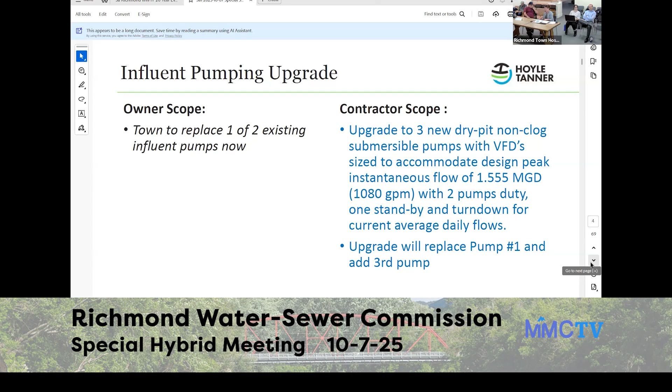The cost for that has been pared back to just show the two additional pumps, the VFDs that will go with that, and the level control system. We do need to upsize the force main from the pump over to the headworks. That force main is not hydraulically... in final design, I can reevaluate that with the pump manufacturers to see if the heads are excessive. In preliminary engineering, it was too excessive at that peak instantaneous flow, but we'll definitely reevaluate as we design it going forward.

That is the price tag, about $500,000 for this, and I want to back up - a couple of caveats. This is tied to the April 2025 ENR index, which becomes important later when I show you the costs at construction time, because I'll escalate them to when you're going into construction. The numbers in these individual cost estimates are tied to April 2025, and include the contractor markup, which is their overhead and profit, their mobilization and demobilization, their bonds, their insurance. It includes all of that, and also includes a contingency for tariffs, because we just don't know what's going to happen.

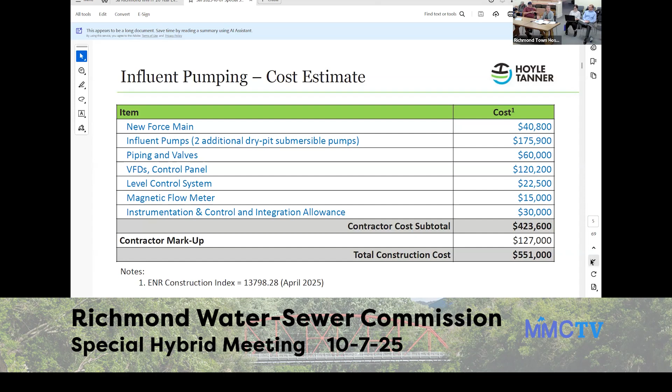You can go ahead to the next slide. Okay, headworks - let's move into this slide.

We went back to the two alternatives we had in the PER. In the original PER, the recommendation was to build a brand new headworks - well, not brand new, but reuse the wet well and put in a piece of screening equipment that could take out rags and all the gross stuff from the channel before the pumps. They took a tour - headworks is the building you walk up to next to the wet well. Right, so we were originally envisioning retrofitting that deep wet well, putting in an intermediate floor and a building above it to get headworks and screening before pumping. The reason is, ideally you'd like to protect those pumps.

We saved a lot of money by going back to alternative 1, which is just to replace the equipment in kind in the building that you toured. So this alternative, the recommendation is to replace in kind - it's all contractor scope, not something Steve would do. This is basically replacing that unit with a Headworks Acceptance Plant, a package micro-strainer and grit removal, all pretty custom, and it has to go into that space that's there right now. I found another manufacturer who could do it, so we could have competition - we can talk about that. But this is alternative 1, whereas before we were looking at a new headworks building, which was alternative 2. We can go to the next slide.

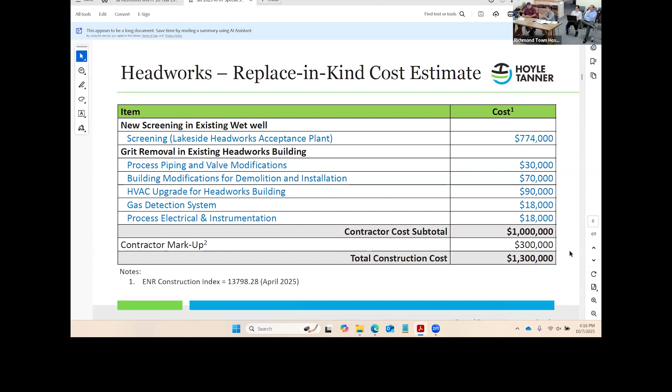In big wet weather events, what would happen if all the flow is just coming in there and it's not getting screened? There is a bar rack, so you could get rags and sticks. Well, there wasn't even a bar rack at that time, it was taken out. We put the bar rack back in.

Yes, the plant operates much better this way. He has protection in front of the pumps in that manual bar rack. He does need to go down and clear it every day, but if we keep the operation of the wet well for the pumps at a draw fill and constant level, he shouldn't have the issues he had before. Historically, we haven't. The bar rack is eliminating a big chunk of change, but we still need to get the grit and rags out of the system, so ideally it would be great if it happened before.

Steve has made operational changes that are working for him. But the headworks would have done that.

This is another tangent question, but I assume we will have to keep running while we're under construction. Absolutely. Do we loop back to that later? Yes, we can, it's all doable.

No, that's a very good observation, a very good question. It's like one of our biggest challenges - we're gonna stop the flow from town for a week. They couldn't stop washing their cars when there was a water ban, so it's one of the toughest things for us to figure out. It is doable, though. You can do anything, Steve. I have confidence in you.

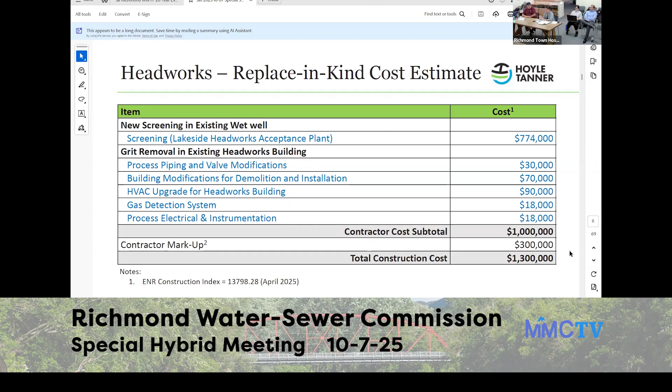We can go ahead and move on.

Biological treatment - these will go pretty quick. We're not gonna do much here. Those tanks are just flowing through. The only thing to happen here is, okay, maybe I should just back up.

The original plan was to switch to a compressed gas mixing system, which is fairly new technology. It's really energy efficient. We were gonna switch to that because we were gonna utilize that same type of mixing over in sludge holding. In sharpening our pencils, we decided that it's expensive, and what's working now, what he has now, works. So let's just stay with alternative one, which is submersible mixers. They're very low horsepower, so it's not like it's gonna be a lot more energy cost or anything like that.

There's 3. Steve is gonna purchase them on his own directly, and the contractor will be in charge of doing any electrical and instrumentation associated with them.

Those are in the headworks building, in the headworks tank that was below the slab, where you lift the trap door up. You can't see them - even if you look down, you wouldn't see them. All they are is a motor with an outboard prop on them.

It keeps everything spinning. They're about 16 grand a piece, the last one we purchased. I think we should replace the other 2 because we've replaced the prop on one of them - it literally was worn to nothing. But we did that with a spare prop that we had. So the other two, one has been replaced, the other two we should replace. And that's not a problem.

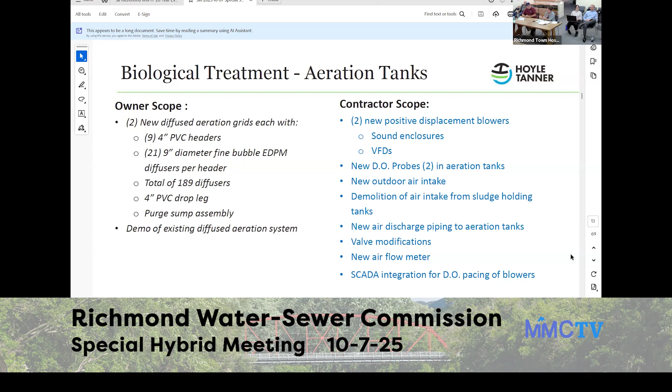I just want to go back to the blowers. We left them in the cost estimate, but we are going to bring in the manufacturer's service technician to take a look at them. Typically you size a blower for your full flows - the aeration requirements at full flow - and you're nowhere near that right now. So it's possible, but these blowers, the condition of them isn't bad, and they'll be okay for a while longer.

I'd like to bring in a technician to look inside them and see if there's any corrosion, because we had the idea 20 years ago to bring air from the sludge holding tanks over, which wasn't such a good idea in hindsight - there could be some hydrogen sulfide corrosion in there. They would take a look and we'd run some blower tests to really see what they put out, and if they're suitable for the design points we need right now. If they're not, we'll replace them. If they're okay for now, this could be something you put off for maybe 5 years, maybe 10 years.

This could be an item that could be put off. New blowers have a pretty big price tag, about $250,000. The intake is what makes the noise, not the blower. This summer, when it was so hot, I switched to pulling in fresh outside air. And truthfully, you guys were there while the blowers were running.

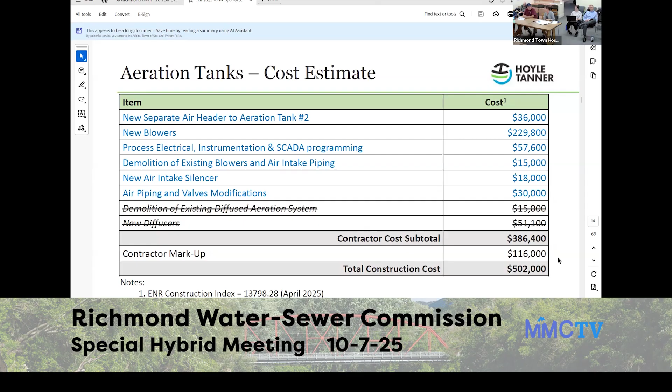So this price went down, if you can see, by about $65,000, but that's before all the multipliers, so actually the savings were better than that. Just to point out where we had some savings, I struck them out in the cost estimate. Like that. We can go ahead to the next slide.

So, chemical feed. Basically what we need to do here, the recommendation was that the containment doesn't meet standards right now, so we need to add a little bit of height to that concrete. That can happen a couple of ways.

We can drill in and put concrete, or Steve could come in with some cinder blocks and make it higher. We've already anticipated doing something with that, so increasing the height, and then new chemical feed pumps and valves, and this is all scope that Steve feels comfortable doing.

We really want to, and I've talked to you guys before, but the workhorse LMI chemical feed pump that we have throughout our plant, and a lot of plants out there, there are better options nowadays. Way better. I really think we should look at switching our chemical feed pumps to a new style.

With these more sophisticated feed pumps, they have controls. We can do a lot of automation that will cut chemical consumption down, which is savings for the town, because this coagulant is what we use to get phosphorus out of the wastewater. It's expensive, and the prices just go up and up every year.

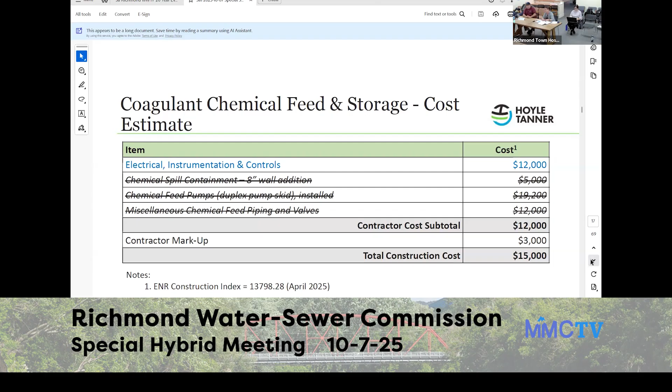Ideally, we have the ability to see what's happening with their sodium aluminate now, but we don't have any control of it. This would give us a little bit of control. I think it'll pay for itself in chemical savings. It definitely will.

Return activated sludge and waste activated sludge pump systems. I call these RAS and WAS.

Steve is going to do any kind of valve replacements. I think you've done most of them already on the WAS side of things, suction and discharge off of that Penn Valley pump. Not on the RAS, but it's not a problem. Anything we need to do with the plug valves, we can take them apart, rebuild them. That's doable for us. The only thing we took out is that, because Steve feels like him and the team have done a lot of them.

So the RAS is controlled by a pinch valve because it all flows by gravity. It's this big valve that's got a bladder, it looks like a water bottle or a water bladder. The valve just pinches it from either end and it controls the flow. It's over 20 years old. Right now it's set for 70 gallons a minute flow through it, or we can throttle that down and it adjusts itself. When we're wasting, we shut it off totally and it closes. It stops the buildup in the clarifiers, the sludge that builds up from going back to the wet well. You're constantly trying to manage that solids level in the clarifiers because it's all part of the biological process. You need to remove a certain amount of solids, you need to recycle a certain amount of solids. Think of it as the food for the microorganisms in the biological process. There's a certain percentage you recycle, RAS, return activated sludge, and a certain amount you waste, WAS, waste activated sludge. It's about balancing those kinetic kind of reactions happening in the treatment process.

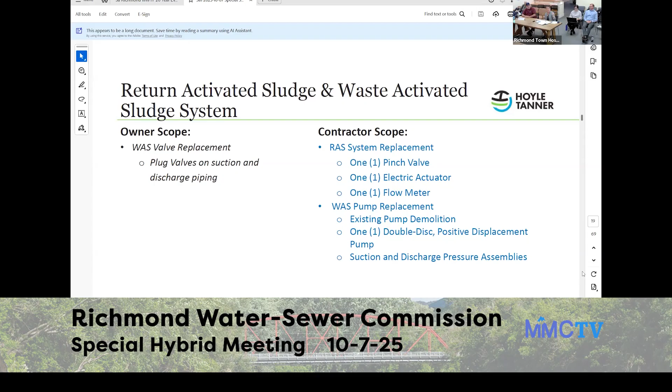So the contractor scope would be the RAS valve replacement, the electric actuator and the flow meter, and the WAS pump replacement would be a new Penn Valley pump. The cost for this is about $150,000.

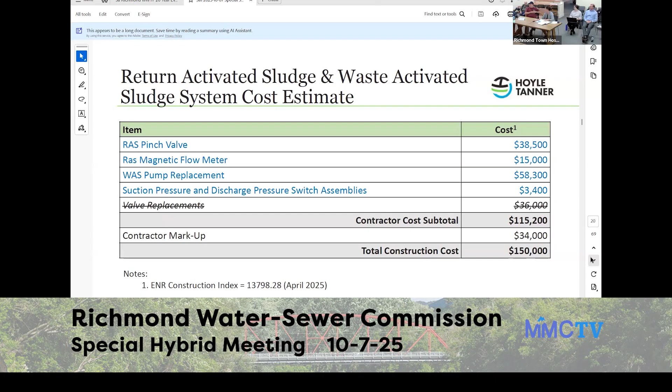So these, are they Quakers? They're made in Pennsylvania, I don't know. I'll tell you later, I saw them at WEF and I told them I'd be calling soon. I told you guys when we toured there, we've got 4 of them, they're workhorse pumps, they'll pump broken stuff, and they're easy to fix. They've made improvements that make it even easier. I've talked with people who hate them, but for us, they really work. That's all that matters.

So filtration, those are those big blue tanks after the clarifiers it comes in. That's where we're separating solids out, and that's where all the phosphorus removal is really happening. We're coagulating, we put in the chemical, it binds the phosphorus out of the liquid stream, and you create a floc, and you're then physically separating it. Think of it like a coffee filter. We're physically separating it, and the phosphorus is bound up in those solids. So that's where the phosphorus removal is happening.

Owner scope, and I may or may not have gotten this quite right, because you keep doing things and I'm not sure.

I know Steve's already changed all the cloth on them, and you've been changing valves and actuators. The contractor's scope would be, we still need to come in and do an assessment of the steel on those tanks.

I suspect there are only superficial things that need to be fixed. I don't believe the whole tank needs to be replaced. We need to have somebody look at them, because there's one that has a considerable amount of rust on that tank itself.

I have one that I'm more concerned about. I don't know why, but this is a risk.

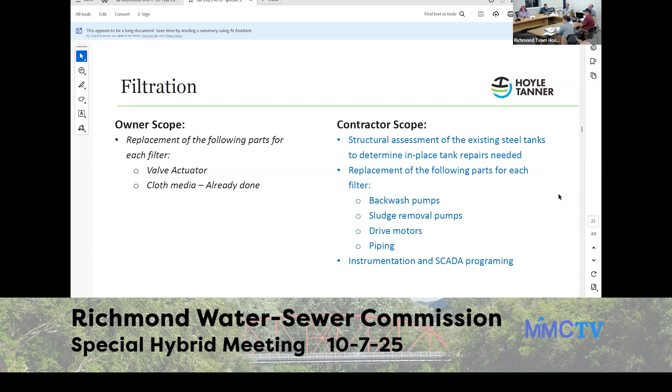So, a little bit of savings by doing the cloth themselves. There's still a significant cost for new panels, PLCs for these, and I did include that in here. Yeah, because their panels are getting old.

They're 20 years old, and the upgrades that have been made in the electrical are much better now. The ones that we have were like first generation, the guy told me. They're obsolete, parts and pieces aren't available for them. His thought was, it's not your valves that are failing, it's your panel, it's the parts and pieces in there. And Allen Bradley doesn't make those parts and pieces anymore, so you're stuck with upgrading.

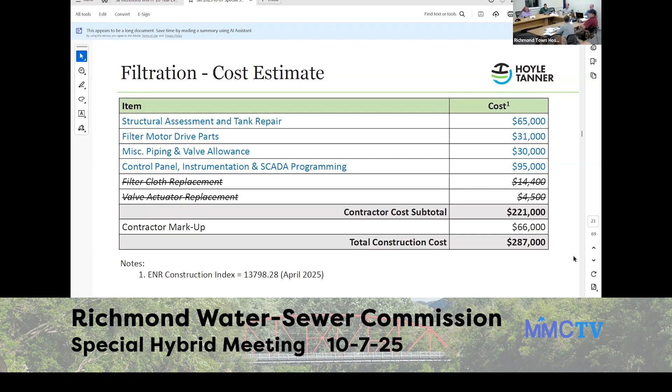So that's where I think we do need to do it. The filters work really well. We don't have much problem with them, other than the control panels and some of the monitoring that goes to SCADA. You can go ahead to the next slide.

UV disinfection, so basically we're talking about just replacing lamps and, where is it, it's the sensor. It's done, it's already done.

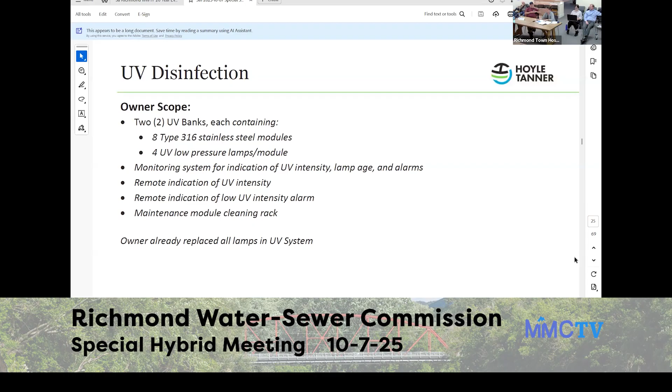We've replaced all of it, so the lamps are all brand new. And we have a brand new sensor. It is compatible to use in SCADA, it's not a Trojan, they're approved. It works, it gives us a number, the state has been happy with our number. So I feel content with it. It was considerably cheaper, so you can go to the next slide.

You can see I know you're a Trojan fan, but yes and no. So we're eliminating this from the project. We can go ahead to the next.

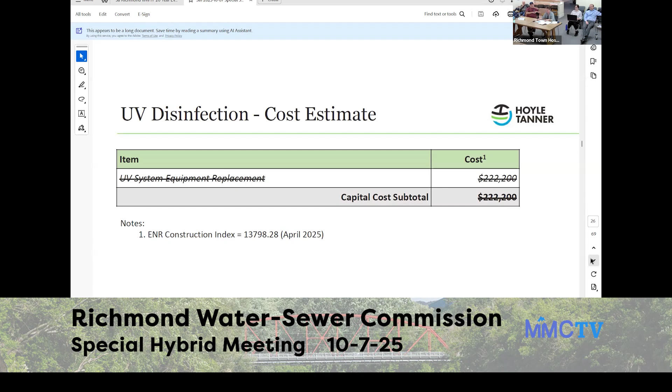So effluent flow measurement, next thing is, you can go ahead. This is all contractor scope. We need to replace that V-notch weir, new radar level sensor and flow meter, and SCADA programming. You can go ahead.

This is where it goes out to the river. There's an actual V-notch that it flows through. It doesn't measure high enough.

Whenever I have somebody come and they're like, why do you have this, that's the flow meter, Sigma, yeah. That particular flow meter was used. It's ultrasonic, and that was pretty good technology 20 years ago.

It's beside the disc, so there's a level sensor, and the sensor is ultrasonic. That technology was great 20 years ago, that's what everybody was doing, and now everyone's getting away from them because it's better. Everybody that comes and does anything there, they're like, you still have this? Why do you still have this?

So we're gonna go to a radar level sensor, which is way more precise. It's just a different sensing mechanism. The V-notch needs to be moved up and increased so that I can accurately measure higher flows.

Right now his flow meter pegs out at a certain MGD. When the river flows up, the V-notch is actually underwater, so it's submerged and we're not getting accurate measurements. You just can't get the flow.

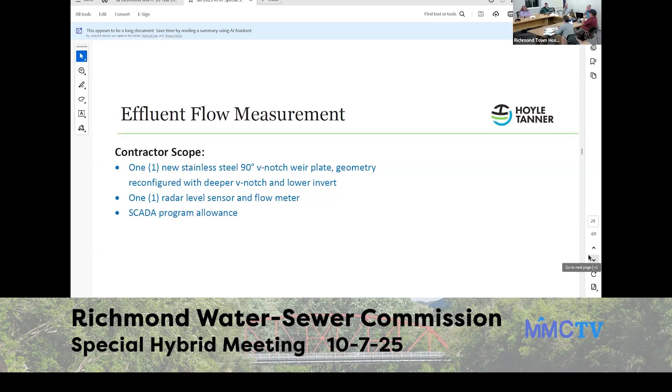Catch you with another dumb question - why do you need to know? Permit. It's not a dumb question at all. You have to measure what you're putting out to the river, and then report it, every day. You have to measure it usually at the last thing before you discharge. Typically the last thing.

So you can go ahead to the next slide. This is a small dollar amount. You can go ahead to the next slide.

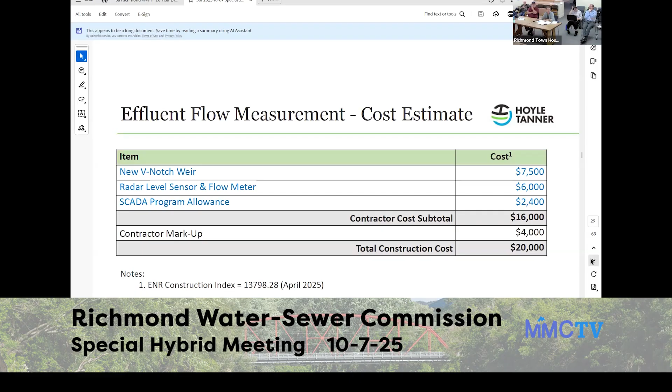Effluent pumping and outfall. So this is all contractor scope, and this is something that is critical. I think if you were on your plant tour, did they show you this? Yeah, I showed them everything. This is the discharge to the river, and the pump station that essentially would be built on the outside of the plant.

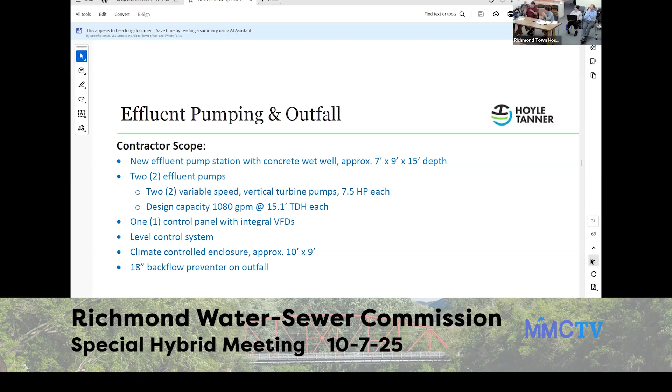Can we go to the next slide? This is the discharge, that's the discharge currently. This pump station would be located on the outside.

This is my conceptual idea. This is conceptual, it's not designed, but it's to put a little pump station out to the side. Normally, flow would just flow straight through it and out.

What would happen is if the river comes up, that backflow preventer would slam shut. And if you can imagine, I've still got flow coming through the plant, so I'm starting to fill up the wet well.

There'd be a level sensor that would kick on 2 vertical turbine pumps located in that square, kind of where Josh's cursor is right now. Those would discharge to, for all intents and purposes, a high water discharge, out the side of the building towards the river.

I have talked to permitting folks about whether or not that was considered a different outfall by the permit, and they agreed that it was not, because the river is right there. If we're in this situation, we're still discharging to the same stretch of river.

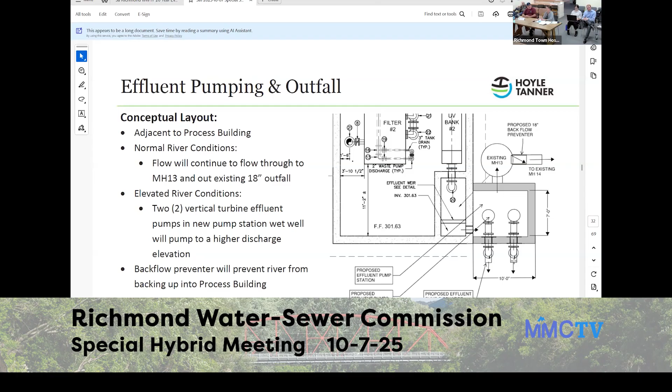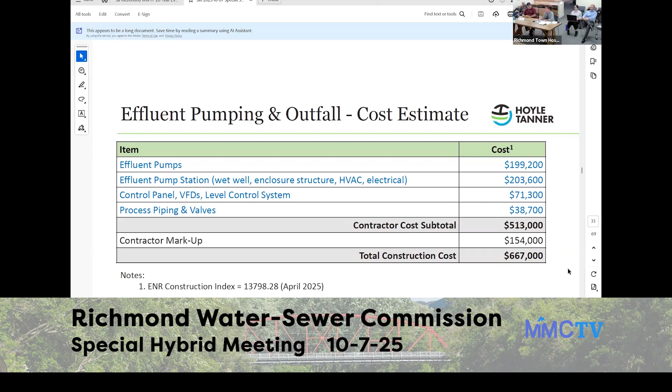So you can go to the next slide. This is the price for this, and again we didn't shave anything off of this, because this is something that needs to happen.

You can go to the next slide. I think you better talk faster, I think.

Septage receiving facilities—we made no changes to this. We understood from our last meeting that we were gonna proceed with septage receiving and dewatering, so the full scope that was in the preliminary engineering report is being presented here.

Because I'm running out of time, I'm gonna go real quick. So I think you guys have read the report, right? Or maybe, okay, it's the same, I mean we tried to—yeah, I know, but I understand. Great nighttime reading. But you're right, great nighttime reading.

Okay, we're just gonna—new septage receiving, let's go to the next slide. I think I have a visual.

We're looking at separating that room from the garage, and making it its own space. Again, this is conceptual—it could change a little bit from this, depending on the piece of equipment we put in. You can go to the next slide.

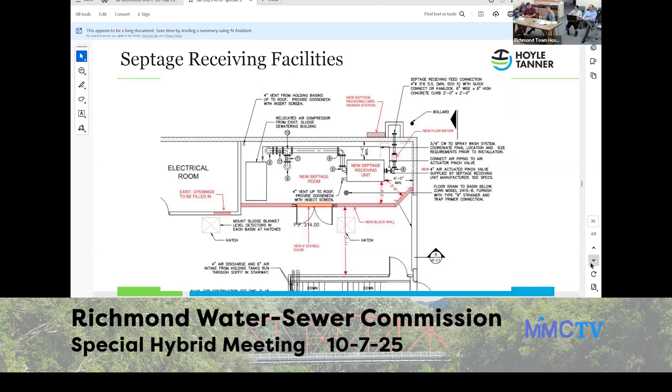This has a pretty big price tag, with the septage receiving unit and then modifications to make that space. Go ahead to the next slide.

Also under the whole septage receiving is anything that has to do with the holding tanks. So these are improvements to those tanks, but what differs from the original alternative that we recommended—as I mentioned before, we were originally looking at a compressed gas mixing system, which is highly efficient. It doesn't use blowers to put oxygen in, it just mixes them.

We reverted back to alternative one, which is to replace in kind what is there now. So that is going back to blowers that impart dissolved oxygen into the liquid. It's a lot less expensive.

Currently we have one blower that does both tanks. So you're replacing that one blower? Replacing one blower that does both tanks, and replacing the blower for the outdoor sludge digester tank. So two blowers total, considering the digester and all. Yep. Okay, so you can go to the next slide.

This is the cost for those upgrades, and again this was significantly less than the compressed gas mixing. Just to note that Steve has been replacing diffusers, so we took that out of the scope—we'll have that done. That's about $100,000 in savings that we're taking out of the scope.

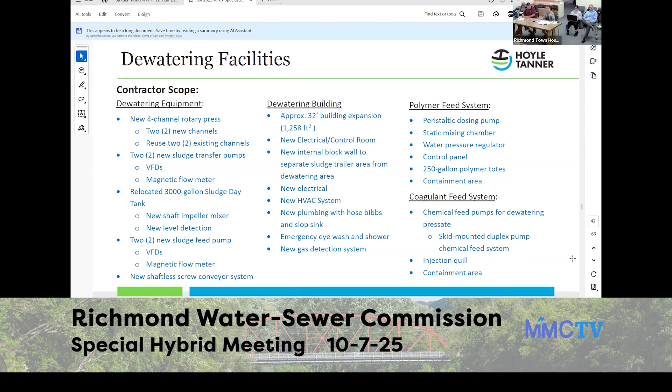Was he dewatering on the day you did the tour? No, I wasn't, it was empty today when I was there. We had an empty trailer and didn't have anything to dewater, but they were able to see it. Okay, so yeah, they got to go on a nice day. Okay.

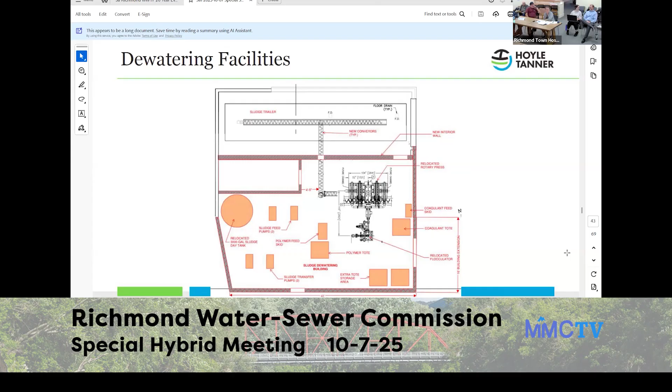You can go to the next slide. Again, these are all the things that I had in the report. This is a significant expense, but this is all part of that septic receiving upgrade. We can go ahead and go to the next slide.

Trying to hurry up. Operations building, there's just some minor things that need to happen. Can we go back to that other one? Just, I know you're. Yeah, okay.

The feed pumps, you want us to start adding sodium aluminate in the press aid? In the press, we'll dose it. So we'll put a chemical feed system there. So this basically is a full replace.

Well, we can reuse the channels that we've got. We're gonna use the new flocculator that we haven't installed yet, that we'll try to get installed this fall. We're gonna use the new control panel that we're gonna install this fall. We've already paid for them, we've had them for a year.

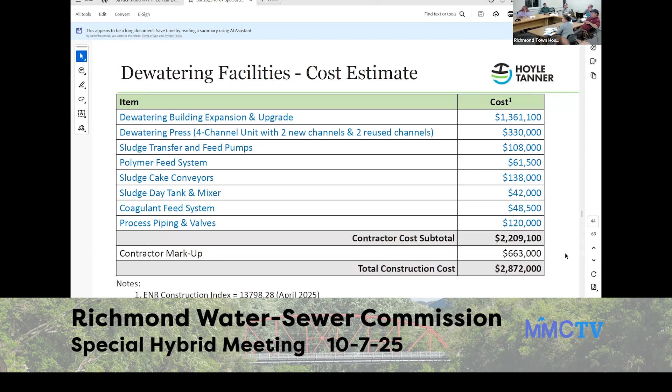All right, we can go ahead. The big thing is the conveyor. I got a new idea, but we'll talk later.

Operations building, there are some plumbing and HVAC upgrades that need to happen. And the top one is, I need to put an access door in that office so that Steve doesn't have to hand carry up a 500-pound pump out of the basement.

So, went soft on this, huh Steve? Huh? So, went soft on this. Yeah.

So the only thing we took out of the scope was any kind of laboratory equipment, the town will buy on their own. We've basically been keeping up on that. So we're not doing any architectural upgrades inside, we're not upgrading the lab. The operations building is pretty much staying the way it is, but we'll make some improvements to the HVAC system.

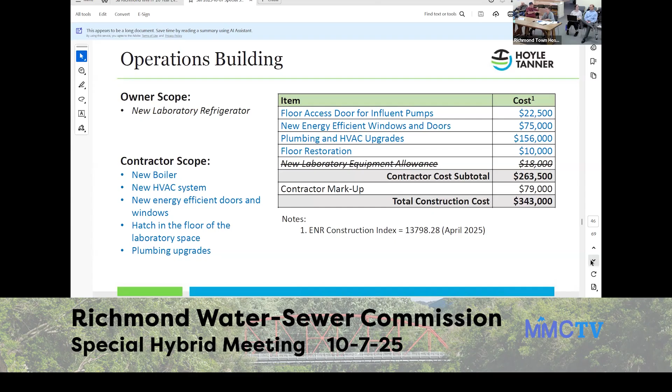Your doors too - so floodproofing doors, there are a few doors that are below the 500-year flood elevation, so we need to have contingency. All they are is like slides, you put the stop logs in if we have an Irene coming. It's not something that would stay up all the time. A lot of other facilities have these, like Johnson, Woodstock - they all have them.

We need to do an electrical assessment of the generator and the whole electrical system. I've kept in the cost estimate a new generator - I don't know, I'm not an electrical engineer. I need to bring in an electrical engineer to do those assessments. So there's a little bit of unknown electrically, what needs to happen at the plant. This could be something that grows, like the cost may go up, because I am not sure.

We're including new SCADA programming to incorporate new equipment, a new plant water system, so you cannot use town water for certain wash up and certain functions over at the dewatering.

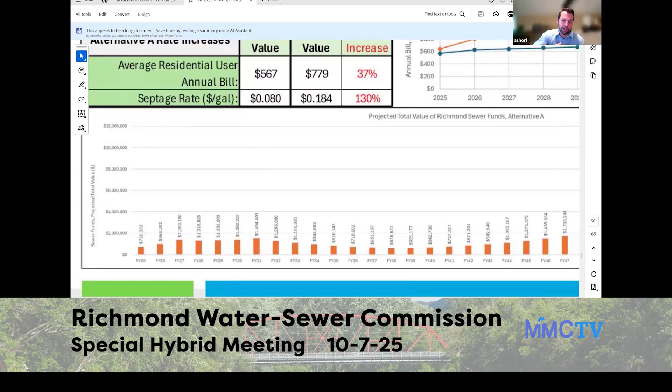That's a very long-term projection, but really what we're trying to look at is we want to keep that number above zero for the entire duration. The intent of that is it's going to simplify everything financially on your end. We want to make sure that you can generate enough revenue, in addition to the sewer reserves that you have available, to stay in the black.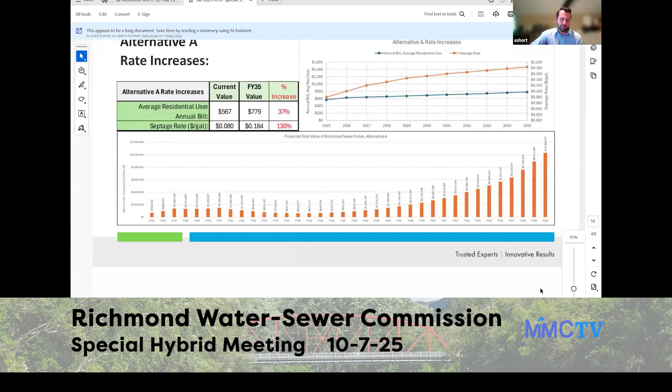So that's really the big thing we're looking for when we're varying all of these input parameters - we want to say, okay, we can keep that number above zero. This will be beneficial for the town. This would be a viable payback structure for you to be able to pay off the loan.

So we are looking at, you can see a couple little bumps in the initial period. FY 28 is when we had contract 1 starting, and then I believe it was FY 32 for contract 2. So you can see that there's an initial little drop, and then after FY 28, FY 29 is not increasing the same way, same with FY 30. You're starting to gain revenue again, and then FY 32, that second contract hits.

So then you start to see the dip again. Throughout all of this, you're continuing to increase your sewer rates and your septage rates by the same as the inflation, so that's not a significant number - that's only 3.5%. However, your principal payment on the loan is not going to change.

So what you're really doing is weathering the storm in the initial years where you're not necessarily starting with enough annual revenue to make the annual payments. But as you increase gradually, eventually you'll outpace inflation, where that loan repayment becomes significantly easier for you to make. So for all of these, we're going to see that little dip in the middle - I call them the lean years, sort of in the FY 30s.

Okay, so that was a lot of overview. That's alternative A. You can click to the next slide. A lot of that's going to inform all 5 of these alternatives, just kind of generally what we're looking at here.

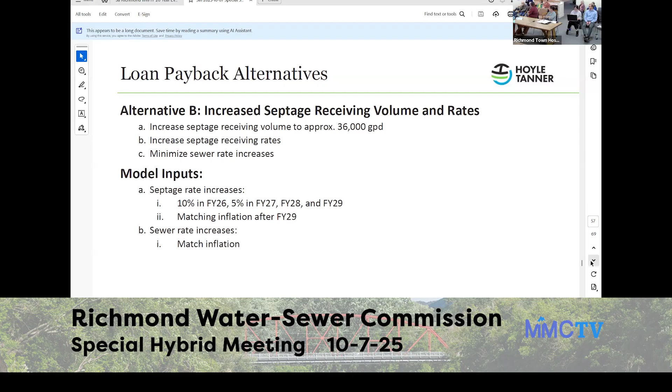As somebody who was water and sewer commissioner when I was on the select board 25 years ago, one of the concerns was when we started really increasing using septic as a moneymaker, was the neighborhood. I think you have to really think twice about sending trucks down there at night. Maybe there's an alternate way to get it there, but that was a concern 25 years ago - the neighborhood with the big trucks going down and the noise that they created.

It's a very good point. All right, so are you ready for the next slide, Aiden? Sure, you were ready a while ago.

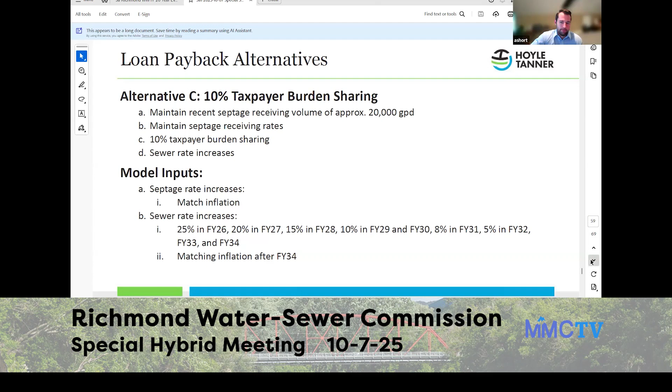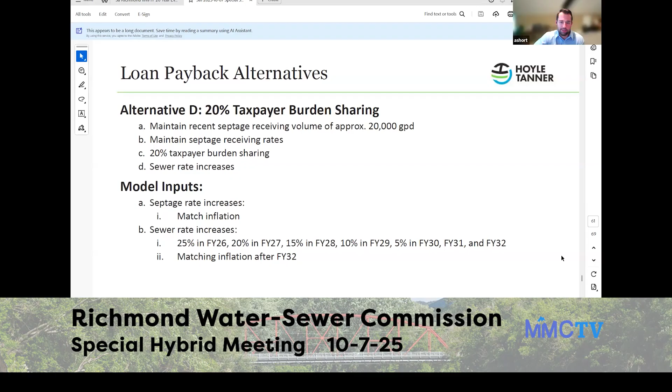Similar to the last one, matching inflation for the septage rate. The sewer rate increases are more significant than alternatives A and B, significantly more so, where we were not really increasing those, but this is reduced relative to alternative C, where we were looking at 10% taxpayer burden sharing. That makes sense—we're basically taking an additional 10% out of the revenue that needs to be generated by ratepayers for this alternative specifically. So we're looking at 25%, then 20%, 15, 10, and then a few years of 5% in the FY30 to FY32 period. You can go to the next slide.

You can go to the next slide.

Alternative E is actually the one that we were most excited about. This is something we've only learned about relatively recently, but basically the Vermont Bond Bank will allow CWSRF loans to be suppressed for up to 100% for the first 5 years. The way this works is you still need to pay the administration fee annually, but you can suppress by anywhere from 10 to 100% how much you are paying from the principal in those up to 5 years. So when you're suppressing that principal, you still owe the full amount, and that amount is slightly increased because you're paying it over a shorter time frame.

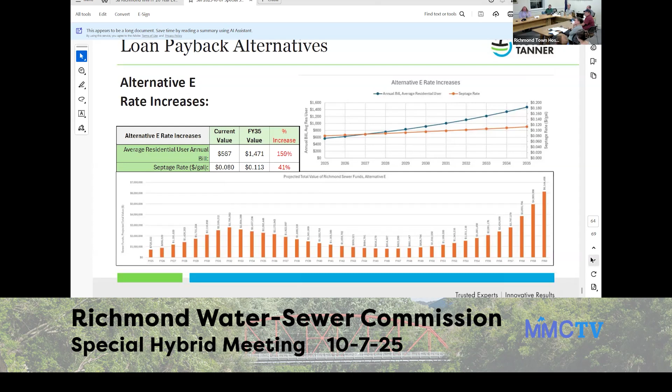So that's the intent of providing the tool as well. We have the base spreadsheet that doesn't really have any specific inputs - we might have played around with stuff, but the other 5 alternatives, we provided the actual tool that has those inputs in it, so you can play around with it as much as you want.

We wanted this to be something that - ultimately we don't want to be bringing this to the meeting and saying these are your only options. We want you to be able to mix and match from different alternatives and say, hey, this works really well for suppressing those first couple years, so we can be a little bit more conservative on bumping up sewer rates, or maybe this allows us to respond to changes in the septic market and we can bump that a little bit more conservatively. So yeah, that's the entire intent of the tool.

I believe we already delivered that as well, but I'm very happy to look at that with you, whatever's necessary to help out. I'm going to quickly do these conclusions and findings. I think I'm also now pushing on my time - I have a couple more slides after this as well that I'm hoping I can cover quickly. But I'll start with this, and feel free to jump in if you have any questions as I go.

So the conclusions - we've kind of discussed this in the overarching discussion, but the ideal scenario is alternative B. Basically, this would require minimal rate increases. There is more risk around this alternative though, just because of the volatility and uncertainty with the septic receiving market. Basically, there are factors that you can't control, that we can't control, so there is some risk in assuming that will be a viable approach.

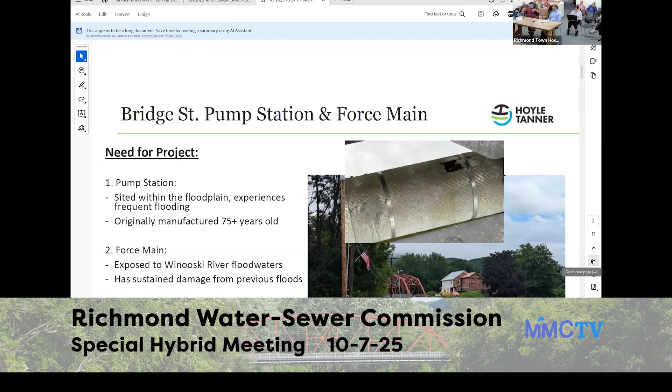But yes, for the most part, the rest of them become inundated with floodwaters going in. Yeah, sometimes they seal up nicely if there's a lot of silt and sand and it gets rusted, and it's not terrible. It's not like it's just an open drain hole, but it's something that floodwaters can get into.

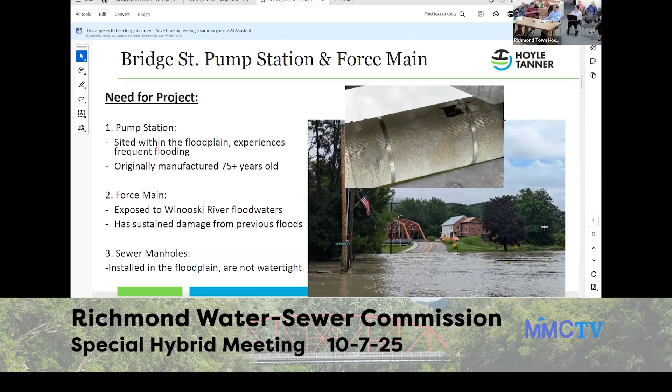Could you go to the next slide for me? So the map here in blue is the 100-year floodplain, a little tough to tell with the screen, but we're looking at the hatched area in red as the Winooski River, the road that comes down on a diagonal is Bridge Street. So the wastewater plant is that little bubble that's not in the blue.

So these are all the manholes that are basically right before the plant, or on the low end of town here. That's Church Street a little bit, Esplanade, Volunteers Green, and on the other side of the river there's a couple down that way too.

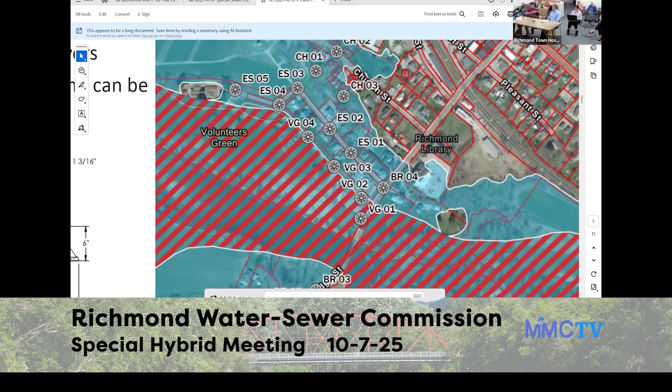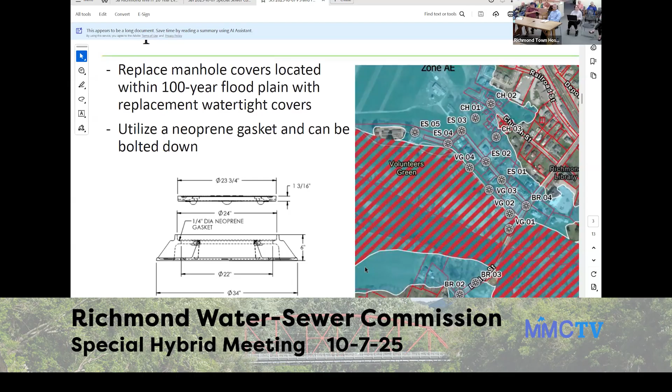Pan back over. This manufactured solution for that is a cast sewer manhole cover and frame. There's a neoprene gasket that lays in there and you can bolt it down, and so it becomes watertight.

So what contractor would do when this goes out, they would just cut the asphalt, peel that back, take the existing one off the top, go down to the block or the brick, put the new one on, repoint the mortar while they're in there, and repave around it.

No sealing with there... you think the whole inside ought to be? No, they have a product now, I've seen it, that they seal around the outsides.

Is that the shrink wrap type thing that they use? That would probably work, we could look into that. I mean it didn't seem that expensive when I was looking into some of the options out there, but it doesn't rely on the mortar making that seal. It goes around that joint.

I don't know the life of that product. I think it's newer technology. It's basically, if you've seen shrink wrap for wiring, they slide a collar over the outside of the manhole, heat it up, and it gets a nice fit on the outside of the manhole versus the inside. So that where the frame of the metal and the brick or the precast comes together, there's not really an exposed joint there. It's just one extra step to stop stuff from getting in there. I would love to look into that, I haven't done that on a project before.

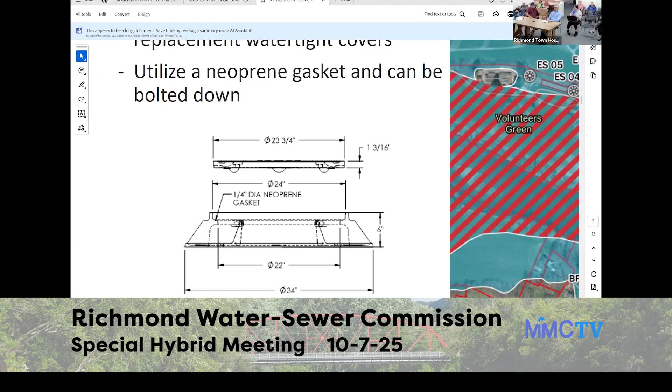Okay, so that's the first one, the collection system, the manholes. Could you go to the next one? So here's a better photo of the force main. You can see the bridge. That upper shiny pipe is the water.

On the top image, that upper pipe is the water, and below it is our existing sewer force main. That's the one with some staining, some water damage, it's discolored. It's supposed to be just as shiny as the top one. It's got an aluminum jacket on it, and it's just been roughed up.

The other photo on the bottom shows where a patch must have been done in the past, where a tree hit it.

In the first photo, you can tell towards the left side of the image, there's some parts of the jacket or insulation that are kind of hanging. Some of the carriers supporting the pipe have gotten thrown off with the velocity of the water, or the velocity of the tree hitting it.

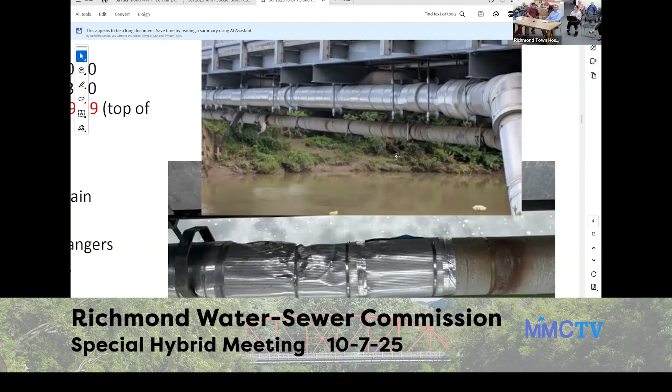It's the trees that come down. I think there was something hanging on it when we came last year. So we took a look, why is only the force main getting hit? Obviously it's lower, but we found out that it's below what the FEMA floodplain elevation is.

Now, when they build bridges, they build it to the 50-year and add a little bit of freeboard. In the wastewater world, we like to build at least to the 100-year. So we've got the elevations on screen: the 100-year is 310.3, the 500-year is 313. Sarah graciously crawled under the bridge and took some measurements for us. We think the top of pipe is around 309.

So that explains why it gets hit whenever it floods. We don't have a solution for where it ought to go, but there's probably not enough room adjacent to the water main there. Those steel I-beams holding it don't seem to have enough lip to put another pipe. Might have to come up higher.

Kevin Kittinger from Richmond: if you're only raising this pipe up to the height of the 100-year flood, and a tree comes down, does the tree always stay at the water surface level and below, or does it stick up higher? It sticks up a bit, so you probably need more margin than even the 100-year plain level. Yeah, there's a guidance document out there that says they want you to design to the 100-year plus 2 or 3 feet, depending on how critical the component is.

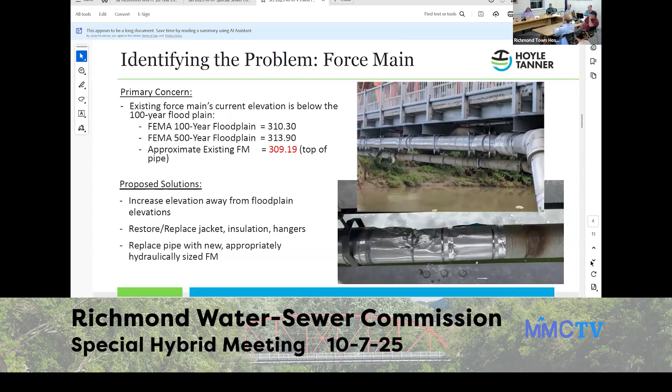The last item is the pump station. We identified 3 potential sites out of 5 originally. We narrowed down the ones on private property since we're not going to consider those.

Site 0, in the center of the screen, is where the pump station is now. Site 1 is across the street from it. And there's also site 5, which is at the higher end as you go up Bridge Street.

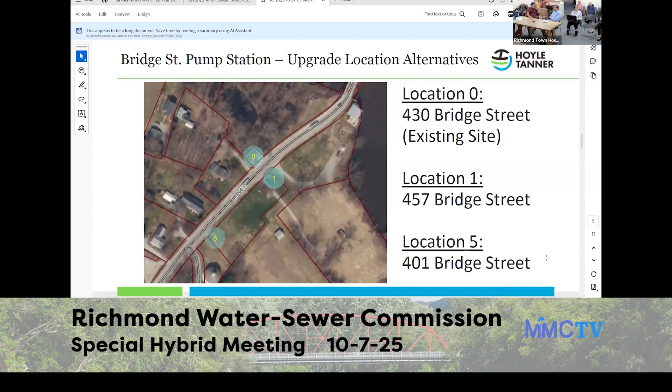Here's some of the technical details. Right now, the pump station's doing about 9,300 gallons per day. We talked with zoning and planning in Richmond, did some build-out planning, and would design the new pump station to reach around 20,000 gallons per day, allowing new developments to tie in without reevaluating the pump station later.

We estimate the new pump rate would be about 58, call it 60 gallons per minute. Right now the station does about 100 gallons a minute using different technology, so it's a bit apples to oranges. With that flow, the total dynamic head needs about a 3 or 4 inch pipe. Right now there's a 6 inch, so that pipe may actually decrease in size a bit.

Depending on where we go with the design, the force main is 740 to 1,100 feet long. We have a smaller pipe size because we're looking to keep the velocity inside that force main up, at least 2 feet per second per Vermont regulations.

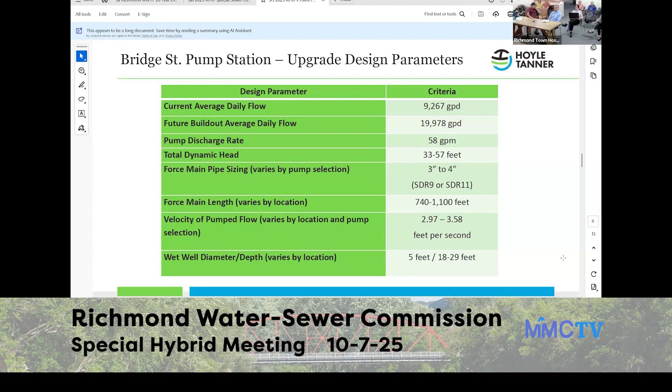Could you go to the next one? So we're going to look at each of those 3 sites and just look at what a design there would entail.

That green little structure in the middle of that parcel next to the gravel driveway, that's the hatch for the pump station now. This site is very small.

This is like next to Old Brooklyn Court, yes. You go right over the bridge, it's on that side, right where it is now. You can't see the control panel because it's covered by a tree. I can't see any of it. Yeah, there's a shadow, but that's right there. Okay, hatch, and then this is the control panel. Thank you for pointing that out.

So the site is just about all you see there, where the driveway ends, on the right side and at the far side. You can see somebody's driveway over here. Very tight site. I would have concerns about how the contractor would be able to excavate this all out without having their equipment be in the road.

They're going to have something to dig with, probably pretty large because of the depths they'll have to go down to. We might be looking at shutting down one lane or having the road deviate around the construction site. It's going to be challenging. There's also power lines just off screen here, and large trees coming over the site. You'd probably want to take some of those down first.

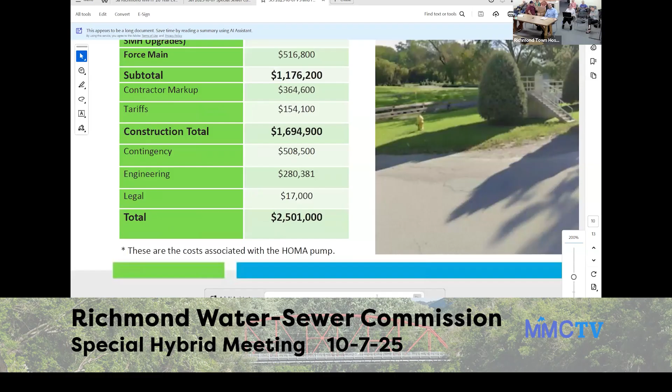In this rendering, it gave me some trees for screening. It looks a lot like the other one, but it would probably be higher than shown here - imagine it a couple feet higher in your head. Same idea design-wise: a raised pad with concrete cylinders coming up, staircase, railing, generators on top. We would do the same thing, and for security reasons put a fence around it. We could do trees around it too, but you don't really have that option at site zero because there's not much space there.

So this project would be a little bit cheaper, we figured. They wouldn't need to do any of that bypass pumping, and it just becomes an easier site to deal with. Sometimes the cost goes up with more headaches, tighter work zones, traffic control and all that type of thing. So we have this one at 2.5.

Frank asks: right now we're looking at a concrete structure with ramp, ladders and whatever - is there a way to create a structure around that that's more pleasing to the viewing public as they come across the bridge? It's an option - maybe put siding on something to make it look a little bit more like... Well, the viewpoint, we're all historical society members, and the look of the round church where we come across the bridge is really important to the Richmond residents.

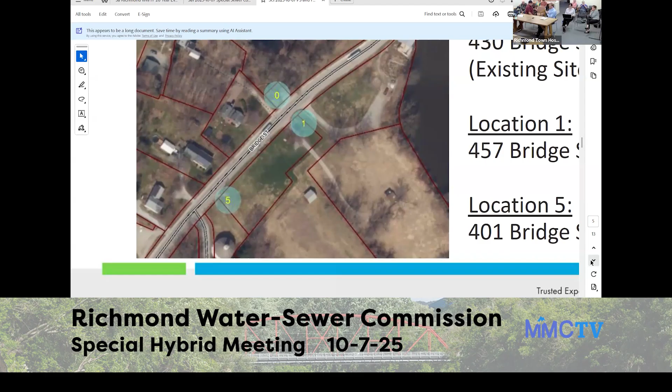There's a lot of questions about that, so we'll throw them all out there and have a discussion. So we like this site. The zone we were eyeballing is outlined in that red box on the photograph. We're trying to keep it as far from the Round Church as practical, but once you move it further away, the grade starts dropping back down. So at this site we're actually outside of the floodplain, which was the driver for keeping it in discussion - it's also not near any known wetlands.

We wouldn't need that raised platform anymore, so you'll see in the concept on the next slide that it doesn't have that big raised brutalist concrete structure shown. We could build it down lower to grade, and still do the same type of things with vegetation to screen it, or another type of structure.

Quick question, Kevin Kitcher again - it's 6 inches above ground, couldn't that be made flush with the ground like the original pump house? We tried to lift it up a bit for snow reasons, and rain reasons too, precipitation. It helps you find it if it's gonna snow a big amount - you see it, you won't have plows hitting it. I've seen that, when Steve plows around it so he can access it.

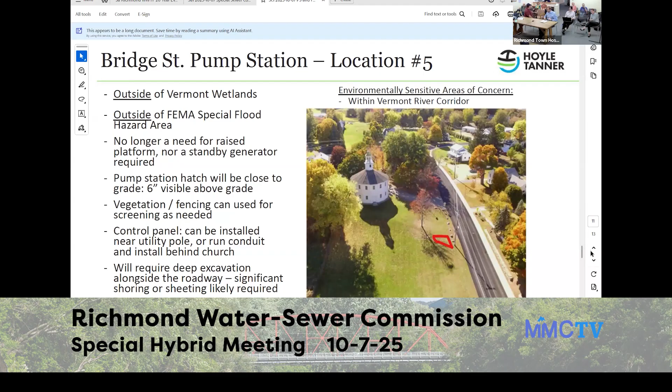Why don't we flip to the next one? Would you consider suction lift? We didn't at this site just because of the depth. We looked at that at zero and one, and we thought it would have net positive suction head potential issues, so we stuck with submersible.

I'm gonna get up and point actually. They were asking about a different type of pump station, called suction lift, where the pumps are up out of the wet well. There are engineering design issues with depth, and that would have to pull up, because I can only lift water so far efficiently on the suction side.

Steve was mentioning the control panels. What we could do is run a conduit across the yard, hide it behind the round church. And that way, for vehicle traffic by Steve and his guys, you could just park in the existing paved area and walk behind.

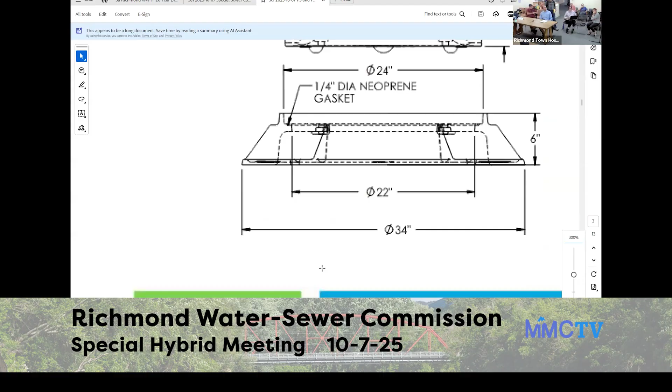Fran sent me the report last Friday night, and I read a lot of it. I'm looking for an alternative because I agree we have to put this somewhere. John Cart's property has a nice bank that's out of the floodplain, and he's pretty close. The elevation change to the base of that, I think, is about 4 feet, though I didn't set up a laser level to check it.

So I went to see John the next day and asked if he would consider selling that corner to the town. He said he was looking at maybe putting a little house in the corner there because he's sick of living where his house floods all the time. But I think there's space right next to it that would allow for gravity feed. I don't think you'd have to go much deeper, maybe another 5 feet, to get over there. And the nice thing about that is nobody's going to see it.

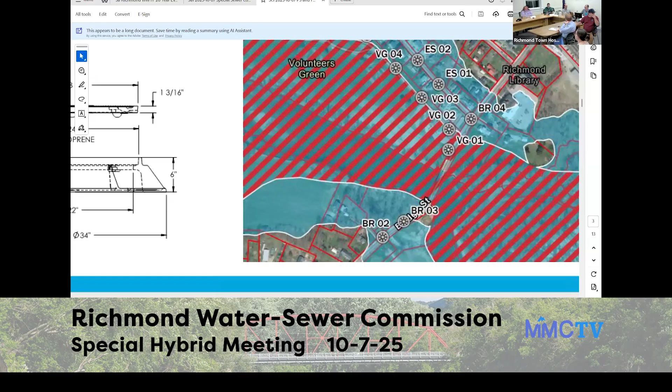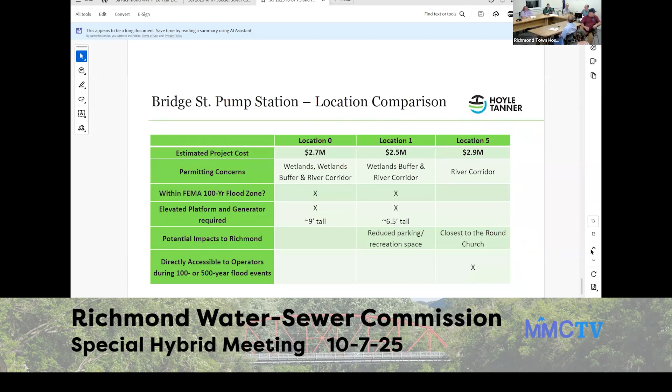Well, we have a lot to cover still on the pump across the river. Sounds like maybe Steve and Gary can get together, as well as John and Eric. We'll make arrangements and look at the options, look at the site a bit and go from there. We're not saying no, we're just saying let's look at it.

I think you should call Ashley too, and ask him about our piece of land that borders that. It still comes with right of ways for the piping and everything. Let's do some exploratory work, though he might say absolutely not. Did the road that accesses the cornfield right now access that spot? No, because there's a brook, but there is a road on that side, you just can't really see it.

Do we want to touch base with Aiden's last slide? The very last slide was just about the schedule and next steps, we don't have to bring it up really, but...

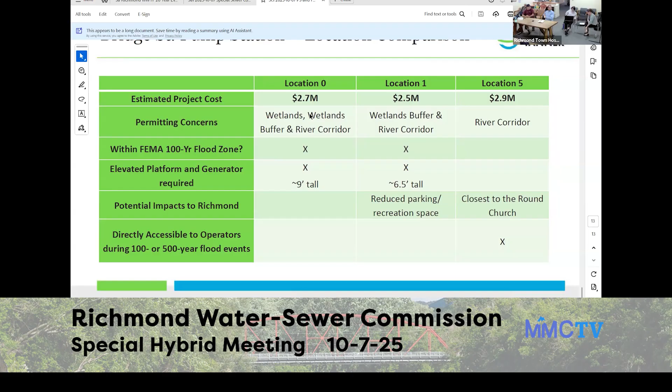I think, Josh, you would have to toggle back to the other one. He's already ahead of you. You're already there, okay.

Do we pick the location first, or do you do designs for a couple of locations? They're separate. Oh, we're back at the other presentation. Okay, sorry, I didn't mean to do that. I was like, man, that's really fast, got it, okay. Sorry, it's past my bedtime.